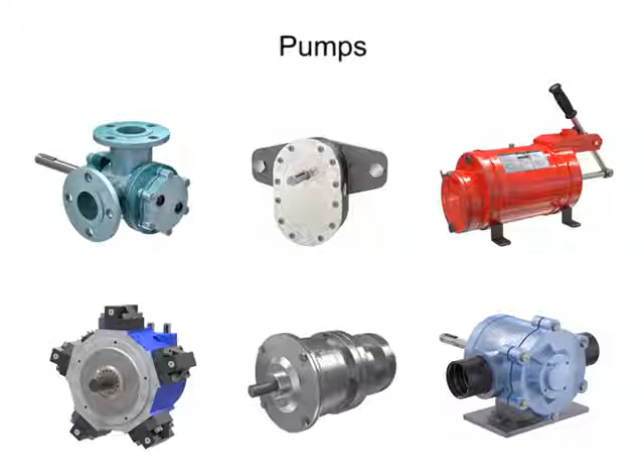Many different types of pumps exist to assist fluid movement in a variety of systems. An external gear pump uses two gears rotating against each other to provide fluid movement.

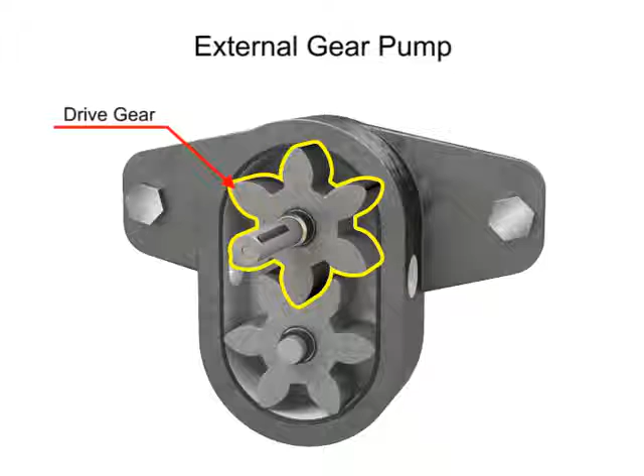One gear is driven by a motor connected to a shaft. This is called the drive gear because it is driven by a motor, and it in turn meshes with and drives the movement of the second gear.

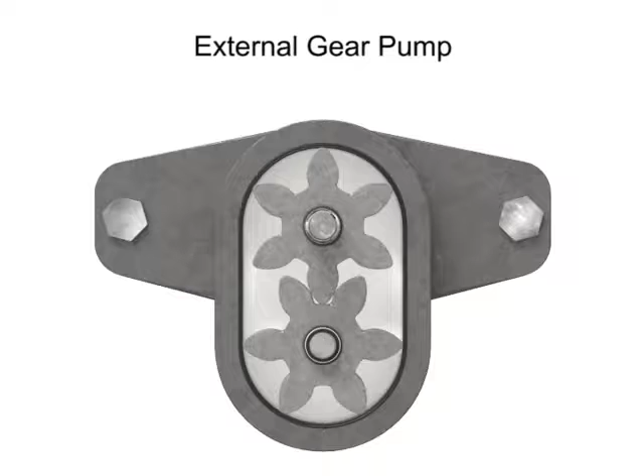As the gears rotate away from each other and come out of mesh, they create an expanding volume on the inlet side of the pump. This creates a vacuum at the inlet port, allowing fluid to flow into the pump. Then fluid flows into the cavities and is trapped by the gear teeth.

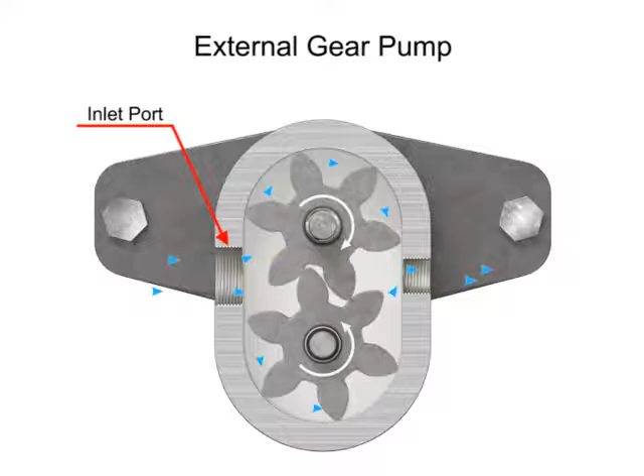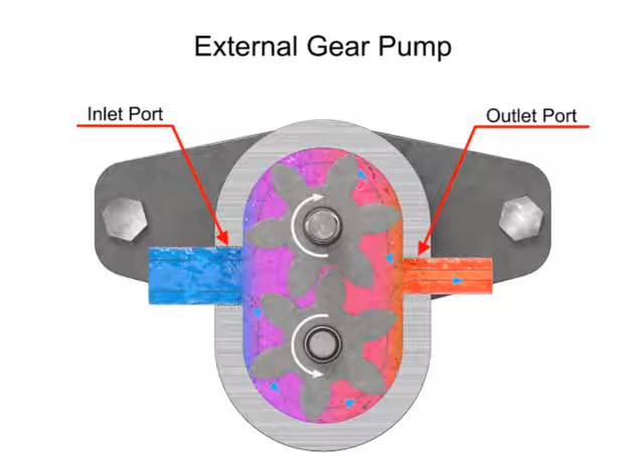As the gears rotate, a flow path is created around the outside of each one. Fluid trapped in the slots between teeth is carried around and discharged into the cavity with the outlet port. Meshing of the teeth in the center of the pump seals the outlet port from the inlet port. No fluid passes between the gears.

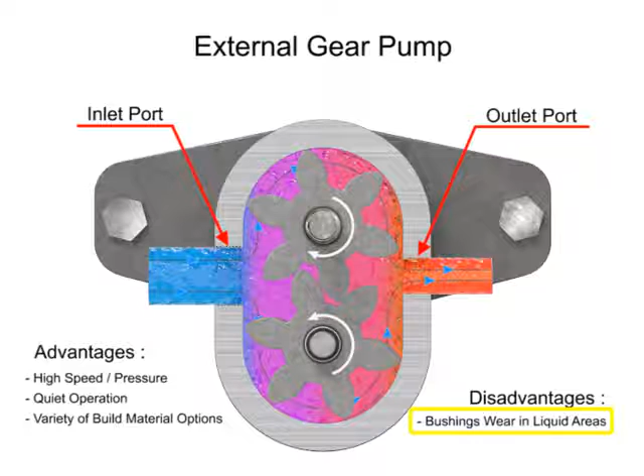The advantages of external gear pumps are their high speed and pressure, relatively quiet operation, and that their design accommodates a wide variety of materials. Disadvantages include bushings in the liquid area can become worn and that they have fixed end clearances.

Internal gear pumps are exceptionally versatile. This type of pump has one inner gear which is inside a second outer gear. The inner gear has a shaft driven by a motor and has teeth that protrude outward. The outer gear has teeth that protrude inward toward the center of the pump.

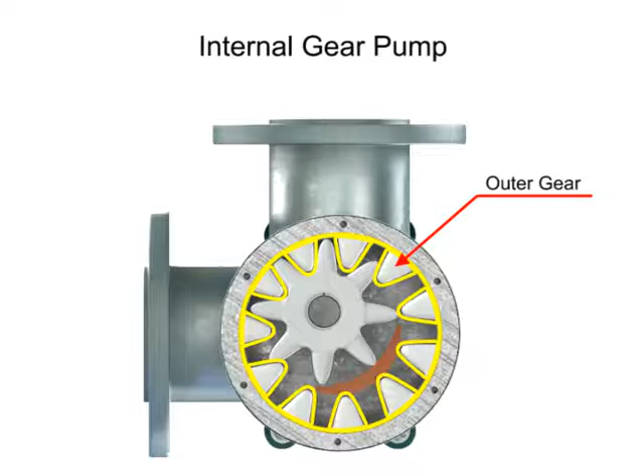As the inner gear rotates, it meshes with and moves the outer gear. Liquid is trapped in the gear spaces and carried from the inlet to the discharge. A stationary crescent-shaped divider separates the intake and discharge portions of the fluid.

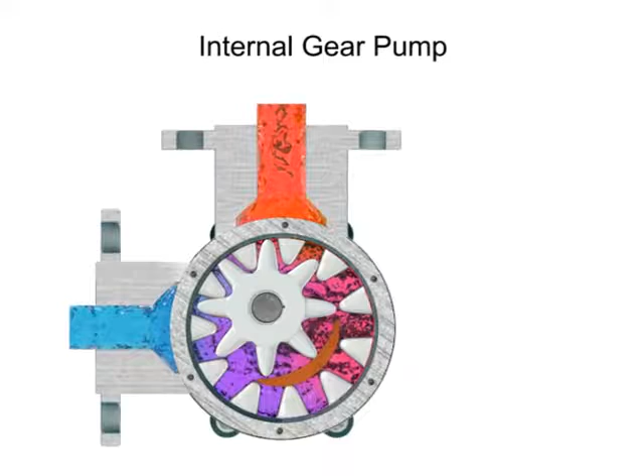Advantages of internal gear pumps are a smooth and almost pulseless flow, and slightly more horsepower for its size. Disadvantages are its higher cost, limited size range, low to moderate pressure ratings, and few sources of manufacture.

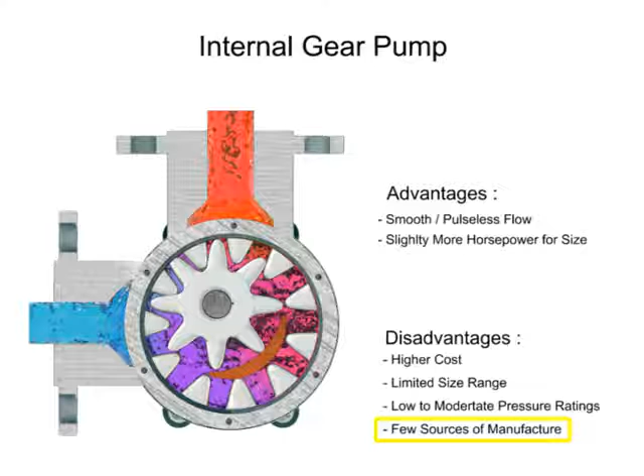A rotary vane pump is a positive displacement pump that consists of vanes mounted to a rotor. The vanes are on an off-center drive shaft. As the shaft rotates, the variable length vanes slide in and out to maintain contact with the pump housing. The tension in the vanes is maintained by either springs or hydraulic pressure.

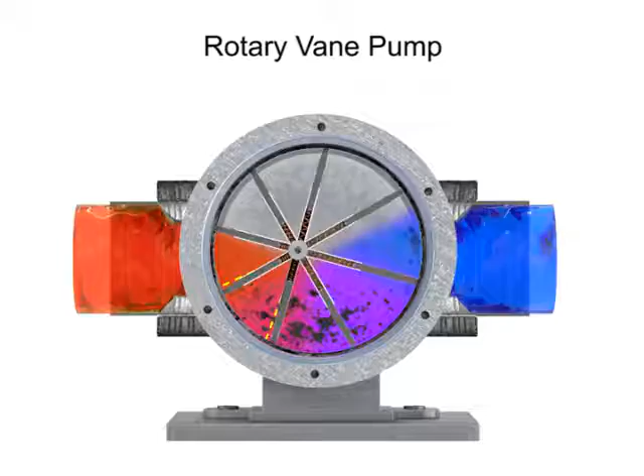As the vanes rotate, they create chambers of varying sizes within the pump. Fluid enters at the largest chamber. As the vanes rotate and retract, the chambers get smaller, forcing fluid to exit through the discharge port.

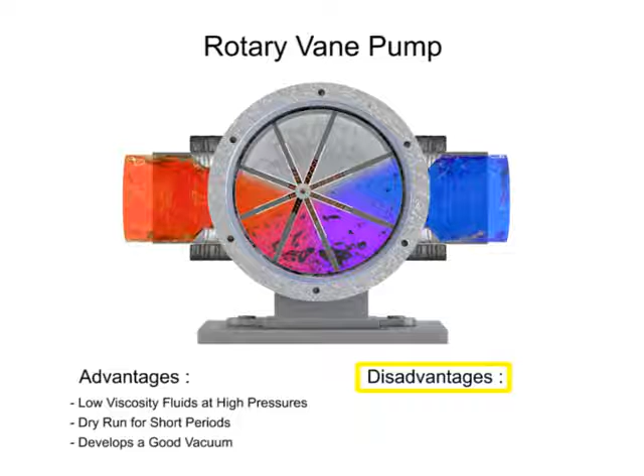The advantages of vane pumps are that they can handle low viscosity fluids at relatively higher pressures, can dry run for short periods, and develop a good vacuum. Their disadvantages include complexity and their unsuitability for both high pressure and high viscosity fluids.

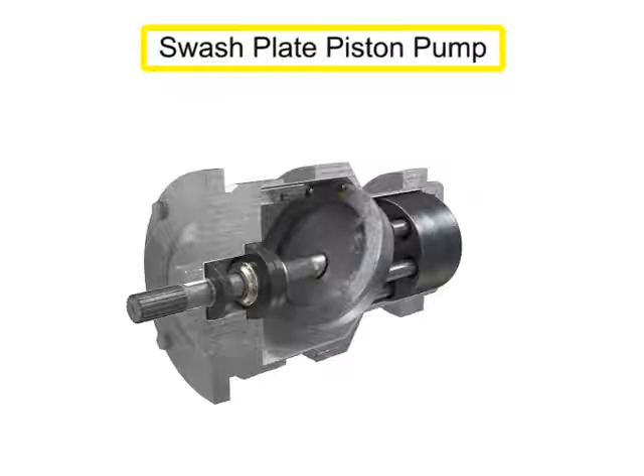Piston pumps come in many different forms. A swash plate is a device used to translate the motion of a rotating shaft into the reciprocating motion of a piston. Swash plate piston pumps have a rotating shaft connected to a cylinder block containing pistons, which are pressed against a stationary swash plate that sits at an angle to the cylinder.

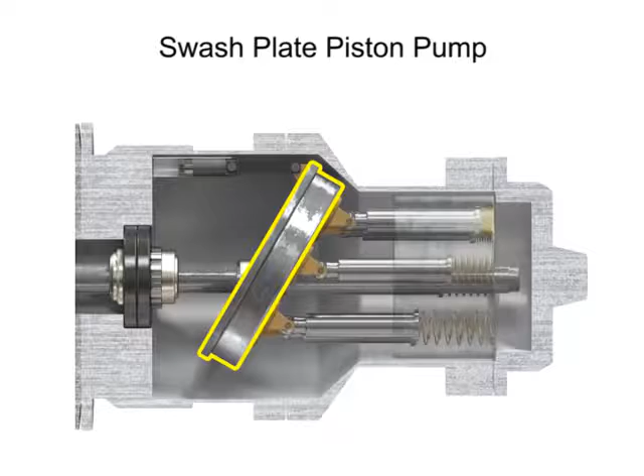As the shaft rotates, the pistons move against the swash plate, causing them to reciprocate within the piston block. The pistons create a vacuum that forces fluid in during half a revolution and expels fluid during the other half.

On the intake stroke, a spring ensures the pistons pull back and maintain contact with the swash plate, causing fluid to fill the empty cavity left behind. On the discharge stroke, the angle of the swash plate forces the pistons back inside the piston block and discharges the fluid. The greater the slant on the swash plate, the further the pump pistons move and the more fluid they transfer.

Piston pumps, in general, are manufactured with closer internal fits than other pumps. This means that internal slippage can be less so that they operate with reasonable efficiency at pressures both too high or too low for the operation of other pumps.

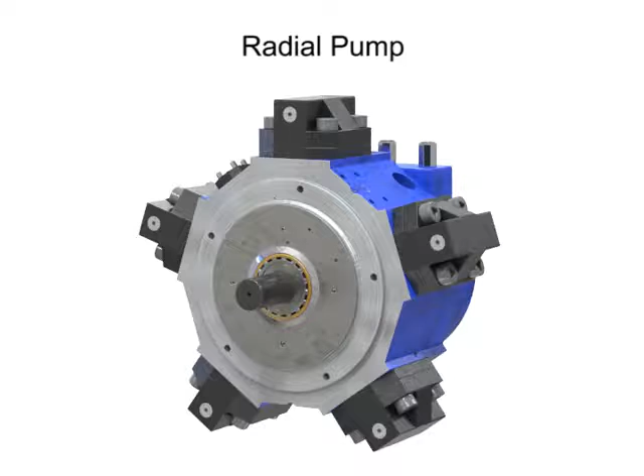Radial pumps are designed so the pistons stroke in a direction at right angles to the shaft. The pistons are arranged like wheel spokes around a cylinder block with an eccentric central cam mounted on a drive shaft.

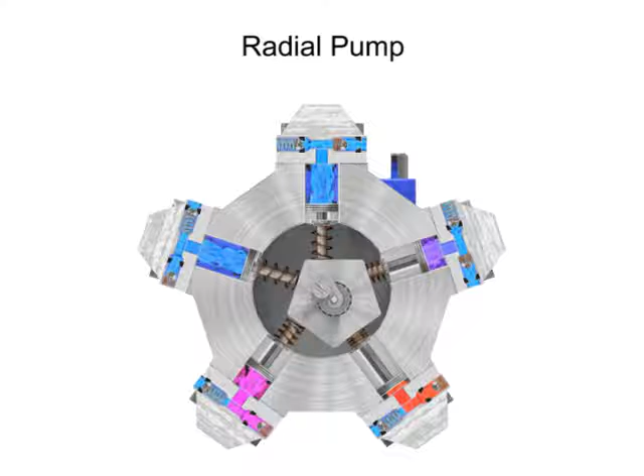As the shaft rotates, the cam moves towards the pistons, forcing them down into the cylinder block and discharging the fluid. As the cam moves away, springs help retract the piston and cause the intake stroke. Check valves ensure that fluid only enters the inlet ports and only exits the outlet ports.

Radial piston pumps have a low noise level, very high loads at low speeds, and high efficiency.

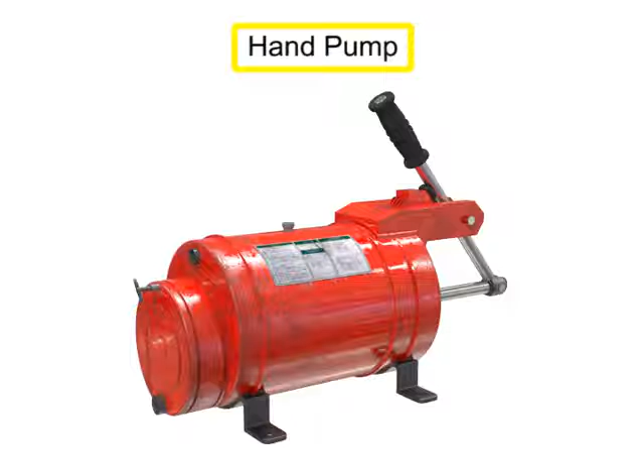Hand pumps are used when a source of power is not available or where the extra expense of a power pump isn't warranted. For example, they are used on shop presses and other portable equipment, serve as standby pumps, and serve as sources of emergency power.

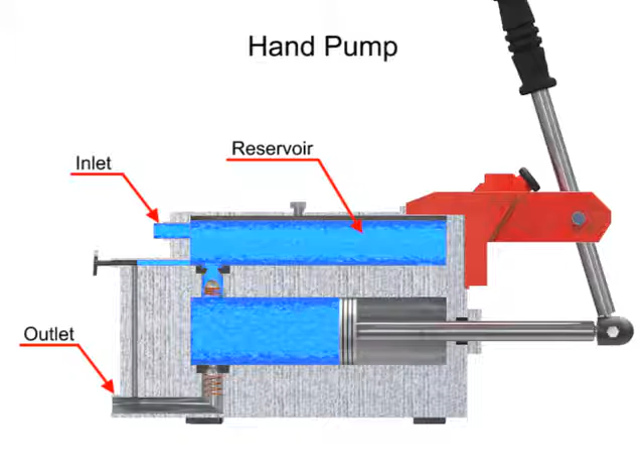Hand pumps are always of piston type and are usually constructed with a piston working between two check valves. Double-acting hand pumps are more efficient, allowing fluid to both enter and discharge on both strokes of the piston. Moving the pump handle in either direction allows fluid to be drawn in from the reservoir and discharged via the outlet ports. Check valves in all locations prevent fluid backflow.